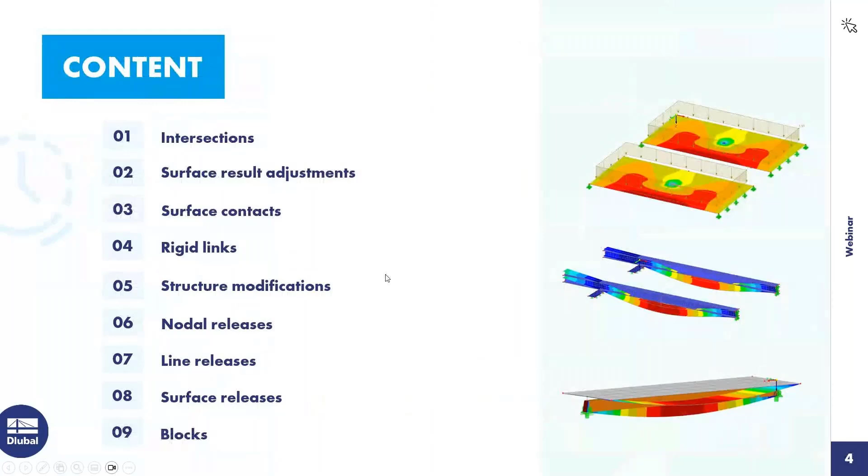To the agenda today: those are the 9 features I would like to introduce you. Very valuable features, but you will use some of them not so often, others more often. For example, you won't use the intersection so often, but the surface result adjustment is a feature you will use more often. For every feature I prepared a model, and I will explain the function of these features in the program.

Let's start in Rfem with the first model and the first feature. You can find all features under Insert, Special Objects, where there are not only 9 features, because there are 2 new ones, the design strips. That's a feature often used in the American market, and we also prepared a webinar about it. Maybe my colleague can share the link in the chat to that webinar about the design strips.

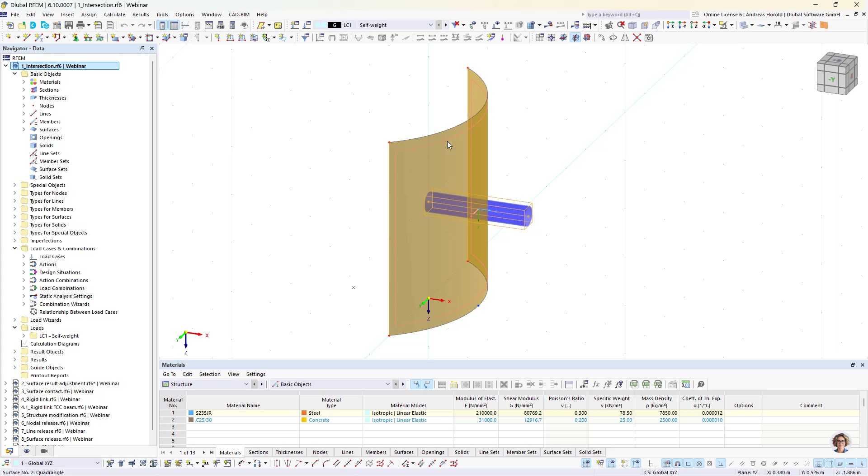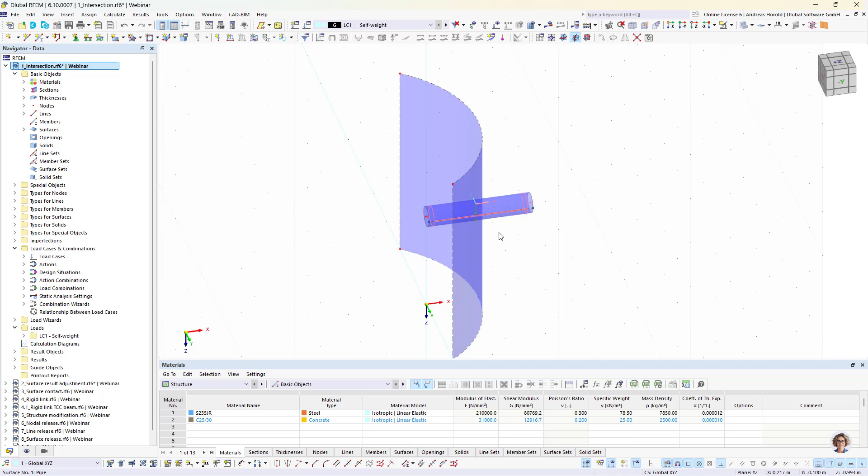Okay, let's start with the intersection. The best way is to select all the surfaces and then create the intersection. But as you can see, that's not a surface, it's a member at the moment. With a right click, I can go to member and then generate surfaces from member. Now all objects are surfaces, and we would like to create an intersection, and at the end this part of the tube should remain and not this one. We would like to have a hole in that surface.

So let's select all, then with a right click move to surfaces, and we can create the intersection. Maybe first the definition: if surfaces intersect and internal forces are transferred on the contact points, it's necessary to create an intersection. This prevents the creation of independent and unconnected subsystems. This function, create intersection, only creates the intersection line.

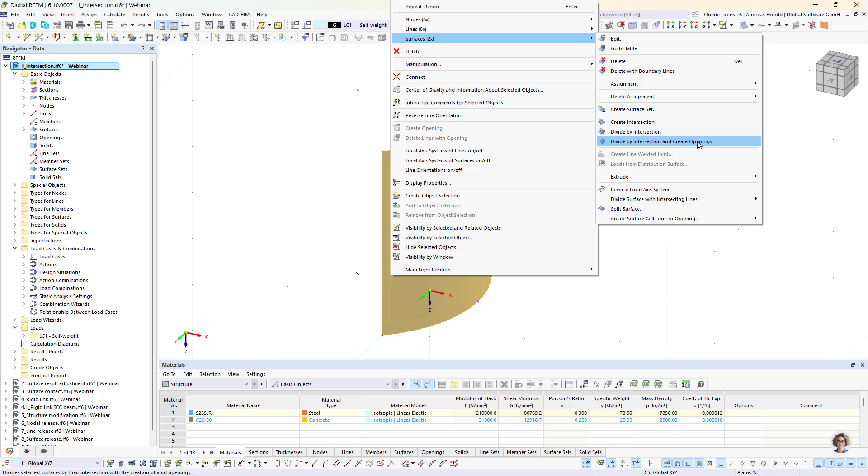I can show that you can see only this line is created. I undo all, then open the dialog again. Then divide by intersection: the intersection will be created and subsurfaces will be created, and with this function additionally the intersection surface is deleted. So we will use that function.

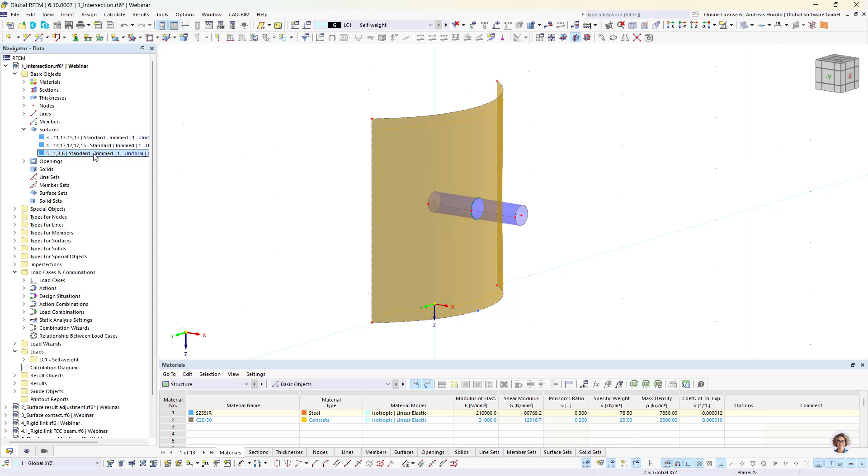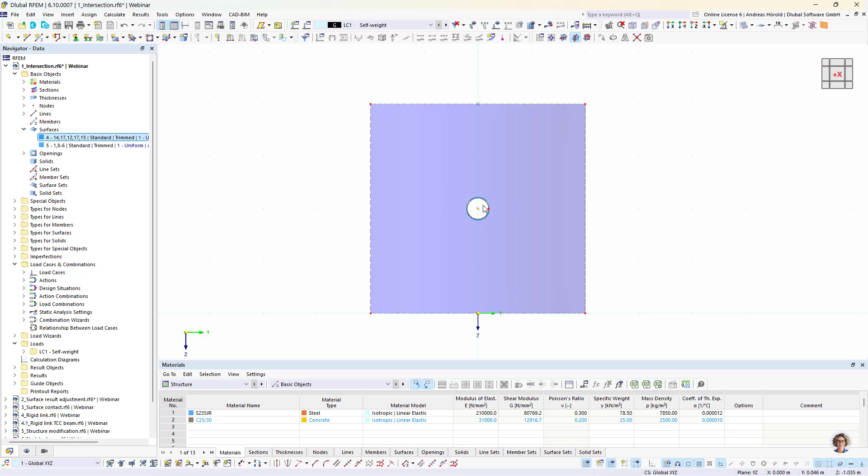You can see there's also a hole, and we can easily delete this part of the tube. But if you have more complex models, I recommend going into the Data navigator. There you see all the surfaces, and you can select the single surfaces to see what you need to delete. For example, with a right click I can delete with boundary lines. So I can also delete this line that was the middle line of the member, and now we have a correct model.

That should be all for that feature. We turn to the next model and the next feature.

So I would like to explain the surface result adjustment. You will also find it here, insert special objects.

But at first I would like to say some words about the surface results adjustment. It describes an area in the model whose graphical results are not represented by the actual diagrams, but as mean values. You can use a user-defined adjustment area to evaluate the smoothed surface internal forces. In RFEM 5, this was called average region, and now the name is surface result adjustments.

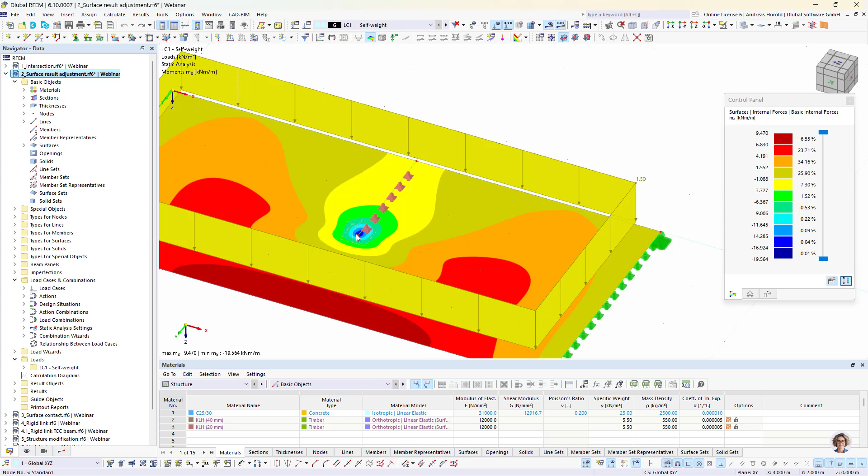We have that surface here. That's the CLT slab over a wall. And you can see there are quite high internal forces only on that point. And we would like to smooth that internal forces.

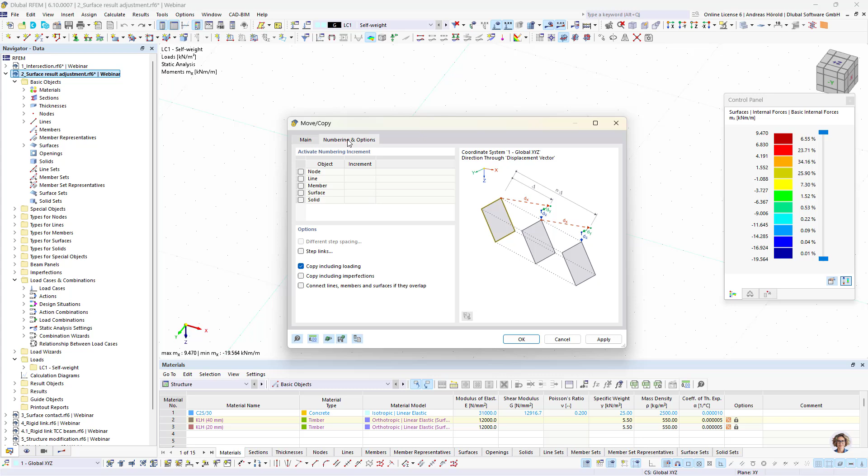To compare the results, I would like to copy that model. So create a copy, 6 meters, and copy including loading.

So I create the surface result adjustment only on that point, and we will compare it with the other point. Then in the menu, insert, special objects, surface result adjustments.

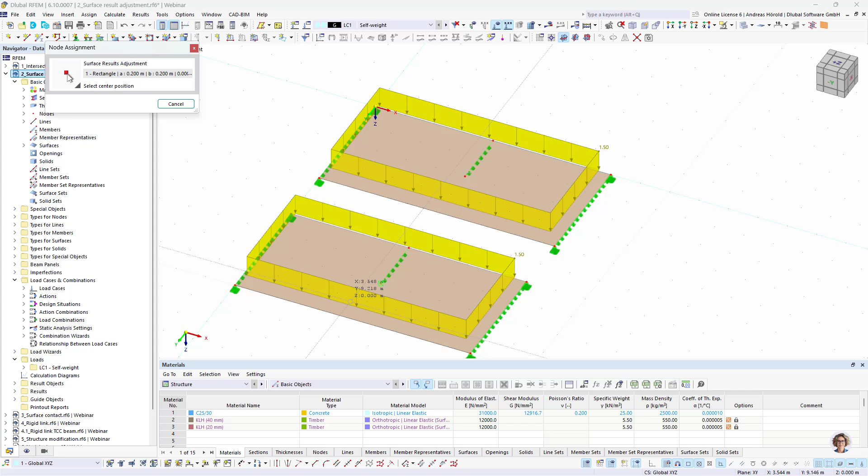Here we have different options for the shape: rectangle, circle, ellipse, and so on. The dimensions should be 20 centimeters by 20 centimeters. Then I select the endpoint of the wall and move it 10 centimeters in minus y direction.

I also have to select the surface, that surface. Then we can calculate all.

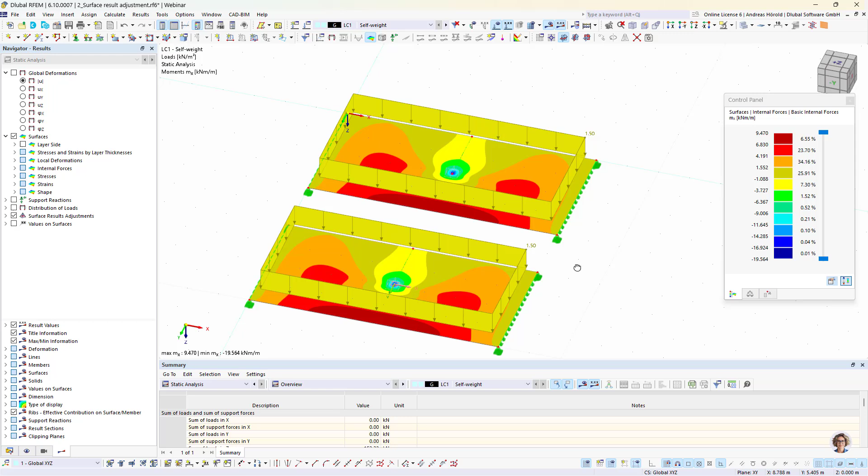You see that's the highest value, but that's the value what we have in the original model, 19.5. So let's check what the highest value is for that surface.

I deselect the original model. And you can see now the highest minus value, the lowest value, is 16.0.

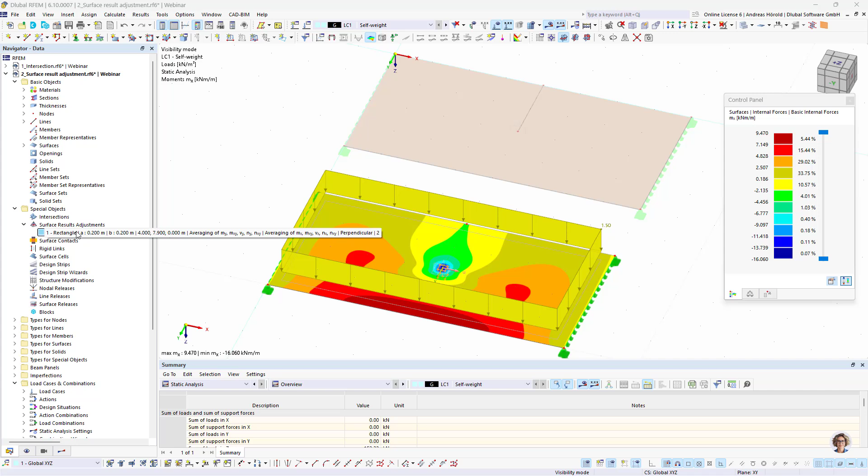Let's turn back to the surface result adjustments. I go back to special objects, you can see it here. Maybe some additional explanations of the different adjustment types.

This averaging of these values, that's the default setting for basic internal forces in surface direction u. And this is the average, the default setting for basic internal forces in surface direction v.

Contact stress area. This option is currently only relevant for the steel joints add-on.

Then user defined: the results of selected types of internal forces are averaged. In that case, mx, but you can select more if you want. That's not a problem.

As you want. Then 0: these results within the area are set to 0. You can also select the single basic internal forces.

And none: the surface internal forces are not averaged, but displayed in a regular way, when you want to average only one direction.

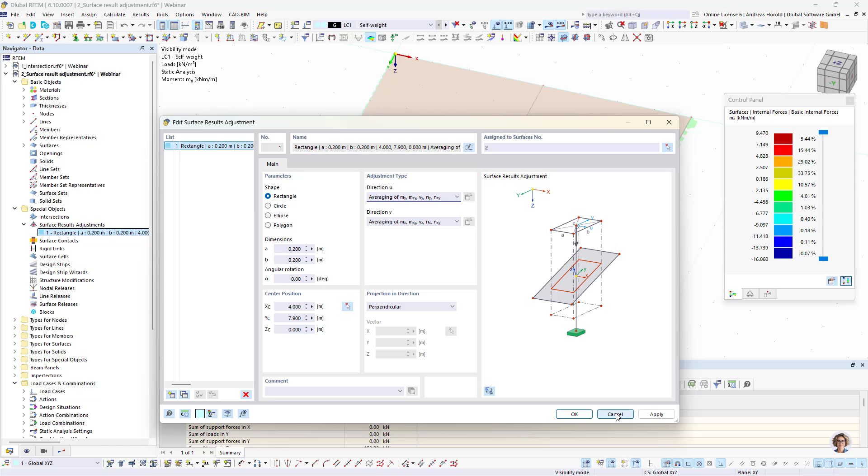So that was an additional explanation. That should be all for that model. Turn to the next model.

The next feature that I want to explain is the surface contact. A surface contact describes the connection between parallel surfaces. It is a coupling of surfaces by which you can control the transfer of forces without creating a contact solid, as was the case in RFEM 5.

This allows you to connect surfaces whose contact is, for example, only effective for compressive forces. And that's what we would like to model here. That's a member created by surfaces, and that's a concrete surface.

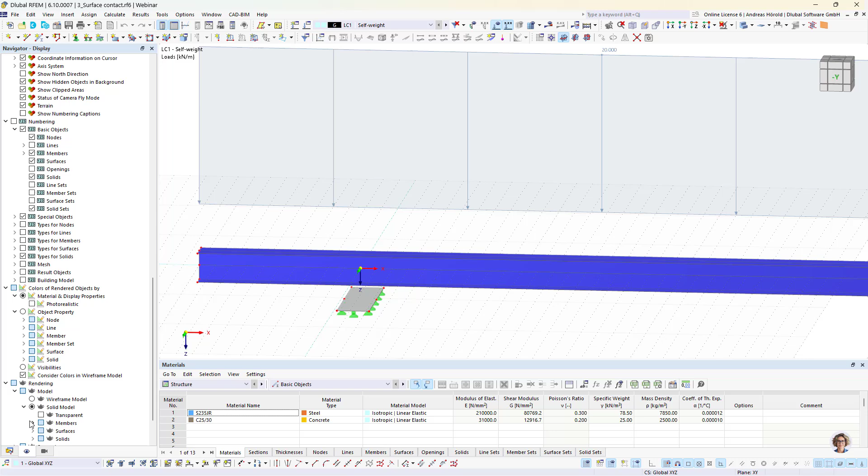Let's display it in the navigator display with the real thickness, so surface filled including thickness. That looks good. But in reality, in our model, it's not connected yet.

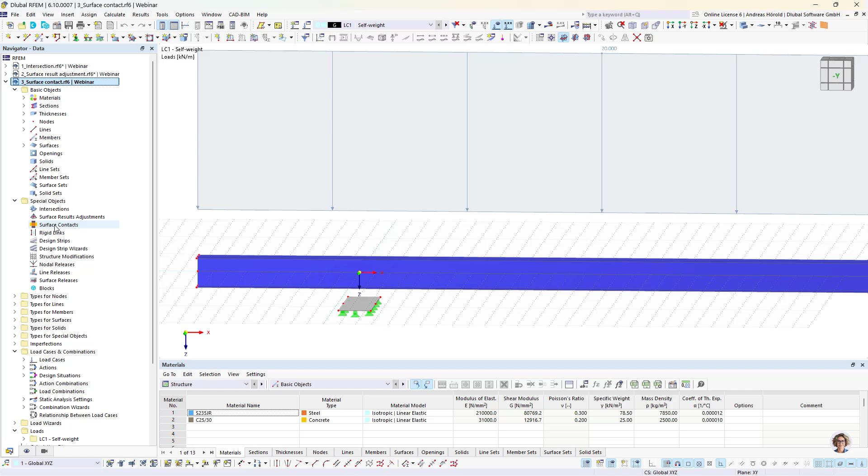So we would like to create the surface contact. This time in the navigator data, that's another option, special objects. Then right click on surface contacts, new surface contact.

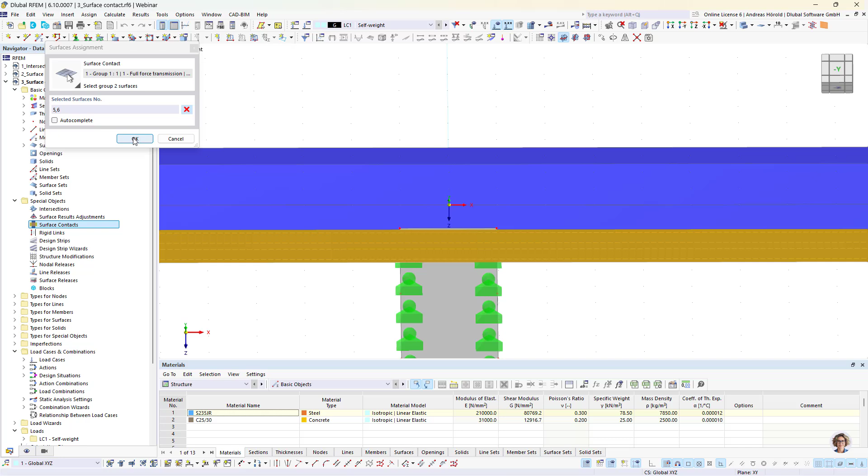At first this surface, okay. And then the flanges, the two flanges of the member here.

So let's calculate all.

The contact is there, but you can see it's rigid connected on all sides, on both sides of the concrete slab.

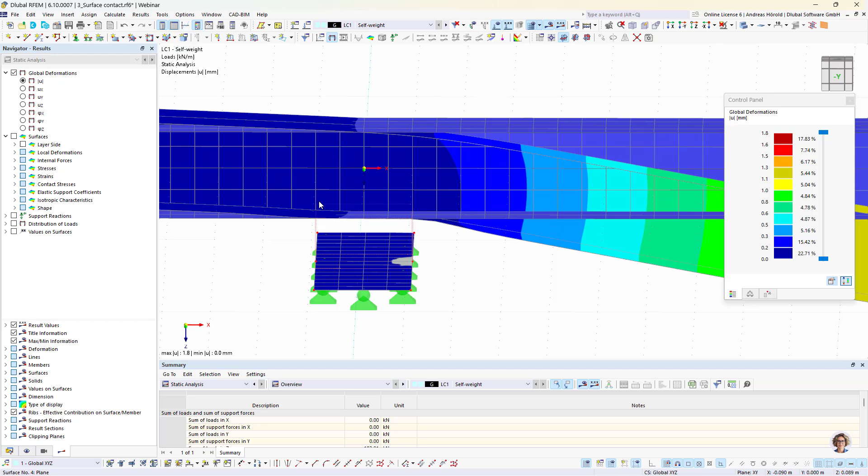But we would like to define it so that it can lift up on this side, so that the member lies loosely on the concrete block. To compare it better, I copy all in y direction, 2 meters.

2 meters. Create a copy and including loading, okay.

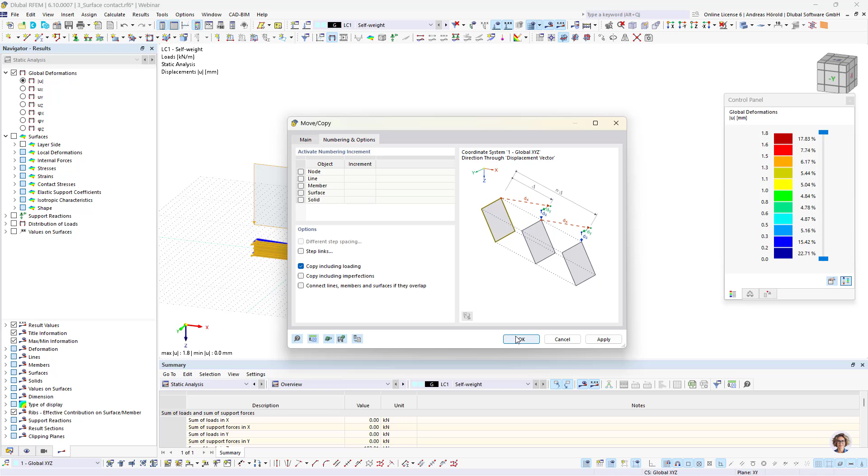So I modify this surface contact. Not a full force transmission, but a new surface contact type: failure under tension, so it can be lifted up. And in that case, rigid friction, I define only a very small friction coefficient.

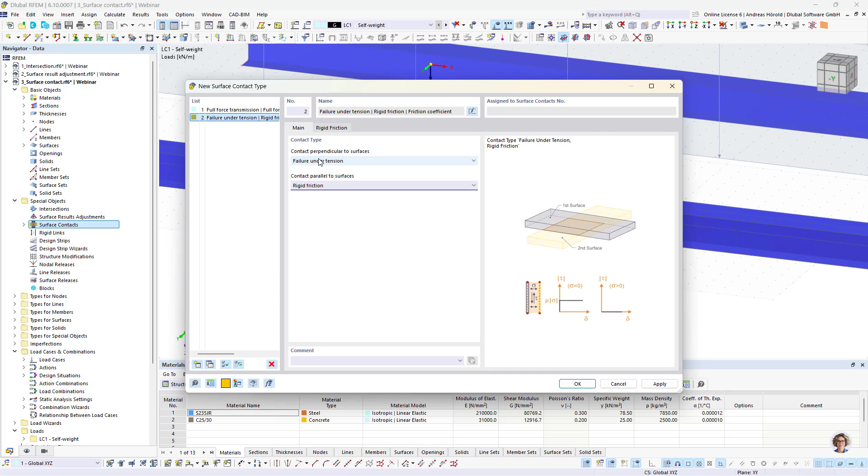But that's very important here. Okay, then we calculate all.

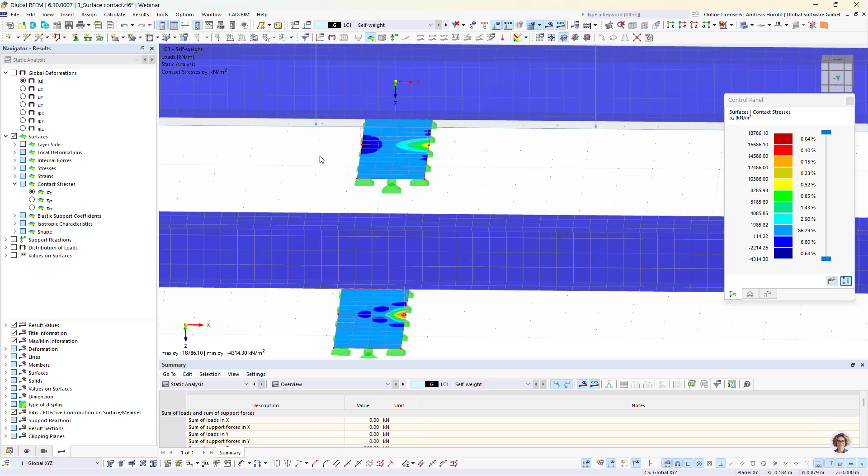And now you can see the difference. It can lift up here on this side. I can also show that on the contact stresses. Now you can see in the original model there is compression here and tension on this side, and on this model there's only compression on the right side and no tension on this side.

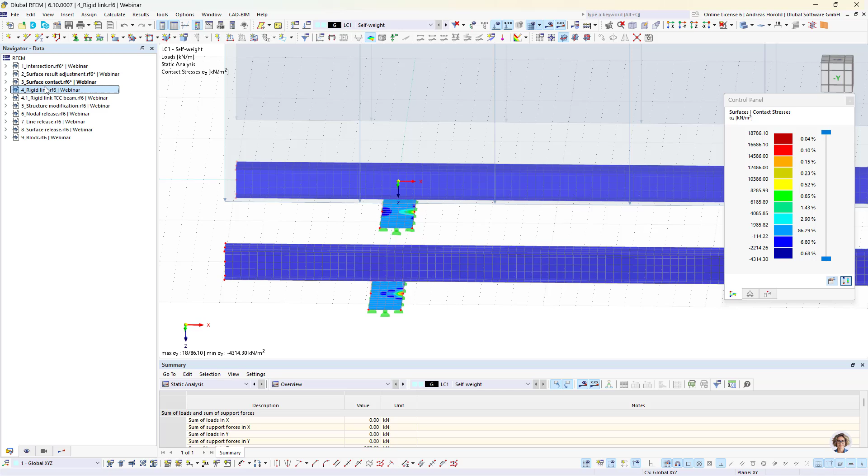Okay, that's all to that feature. We turn to the next model and the next feature. Rigid links is the next feature. By using rigid links, you can model connections between lines, members, and surfaces without defining coupling members or rigid surfaces between the objects. Deformations of coupled nodes, lines, and members are identical for a rigid link.

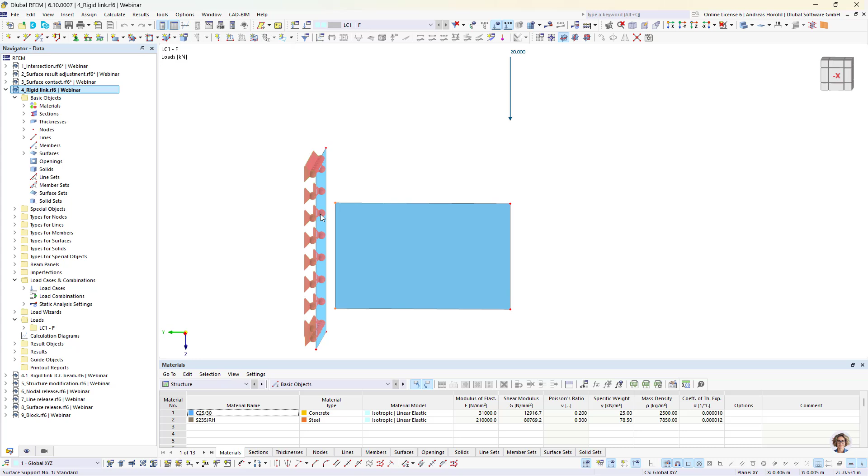In that model, I could also define a surface here, a rigid surface. But with that feature, it's quite easier. The real advantage of this feature is the objects can be placed on their actual location. When I turn to the navigator display and select filled including thickness, you can see all is in the place where it really is. So, and now I create the rigid links.

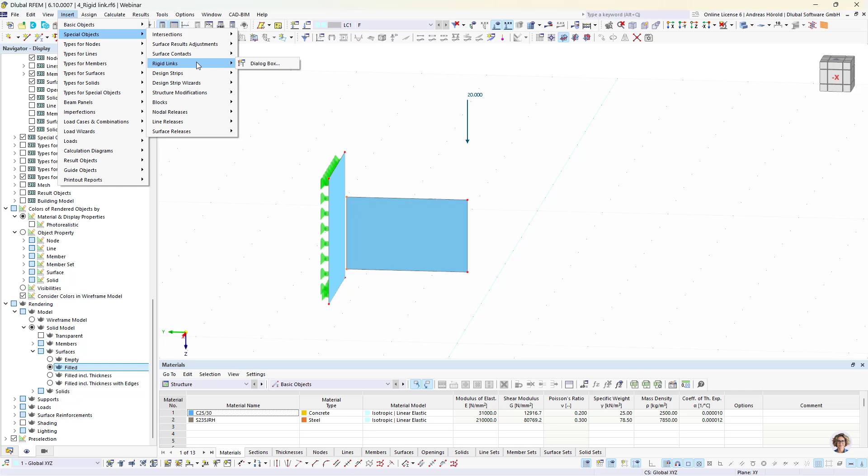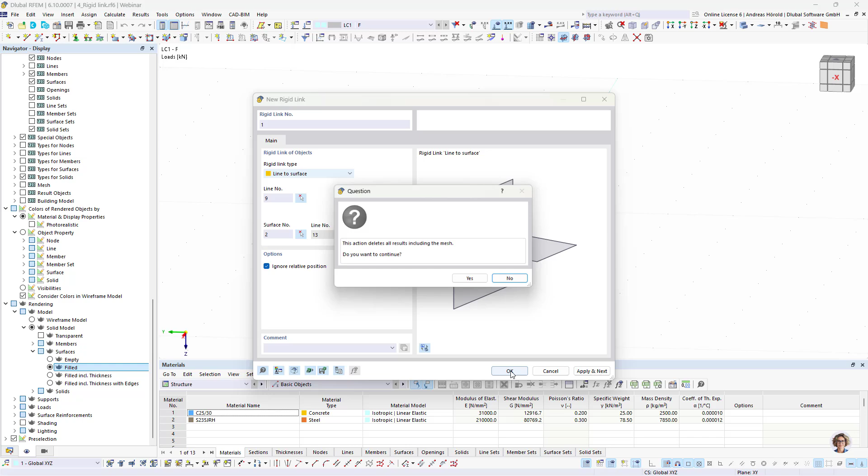So insert, special objects, rigid links. In our case, line to surface. That's the line and that's the surface. And you can see the line and the surface is automatically created. Okay. So now we can calculate all. Okay, that looks quite good.

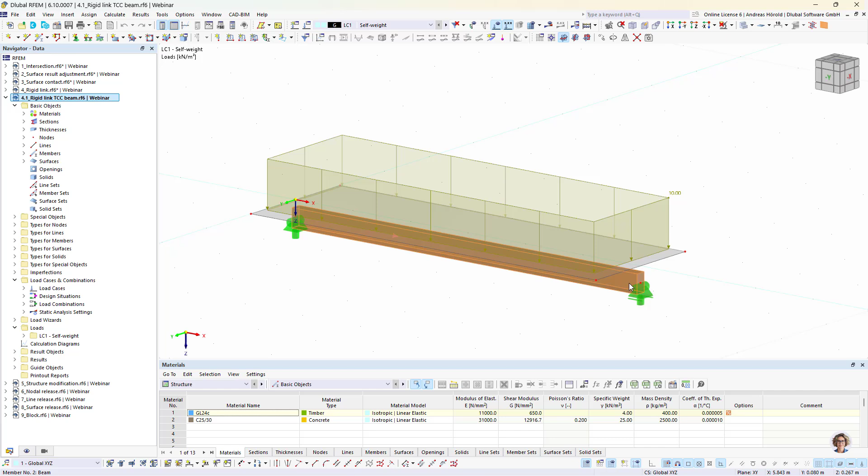I would like to show that on a more practical example, I think. That's a timber concrete composite beam. You can see that's a concrete surface in its actual position, and that's the timber member. And we can also go to the navigator display and select filled including thickness. But we need to create the connection.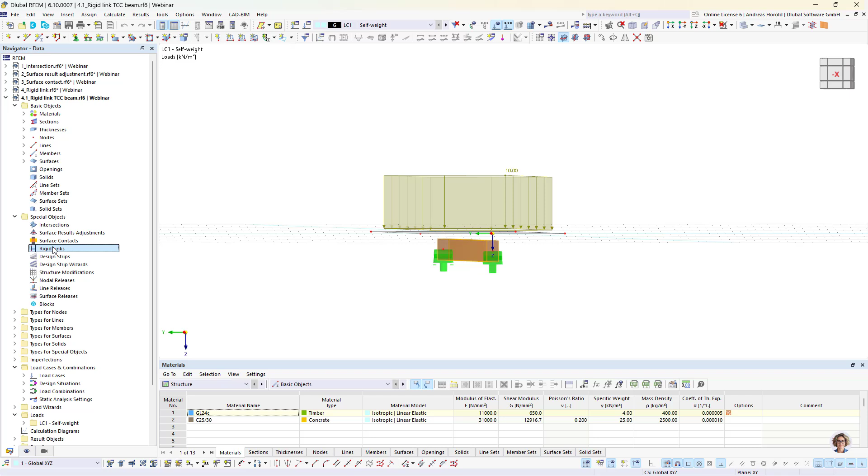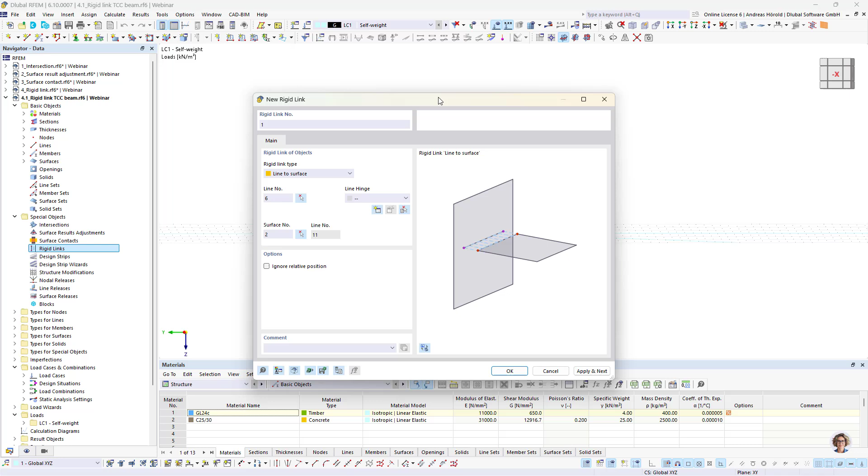So special objects, rigid links, right-click, new rigid link, line to surface again, the middle line of the timber member and the surface. Okay, and this line is created automatically. And we have to deselect that option, ignore relative position, because we would like to consider that the member is below the surface. Okay, so let's calculate all.

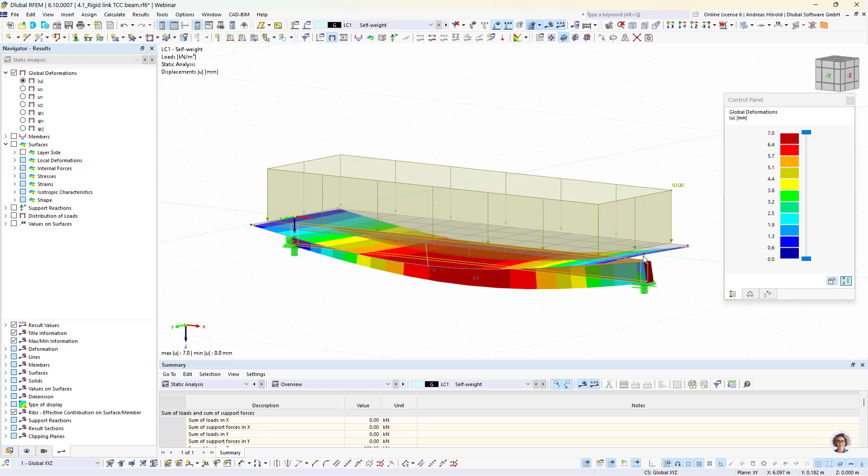At the moment, we have a rigid connection between the surface and the member. And that's not really correct, because there are joints for this connection, and they are not rigid. And that's why we need to select a line hinge. So how to do that? We take a look at the result. I think you can't really see it. Okay. 6.8 is the deformation in that point.

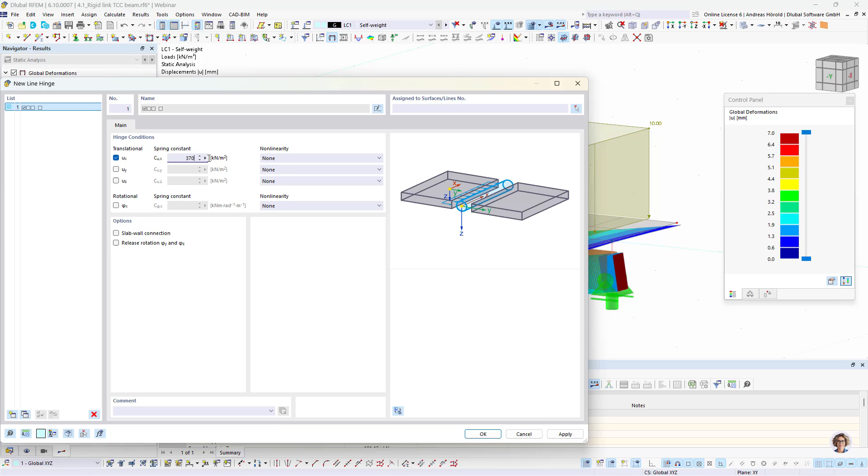Then we do a double click on the rigid link, and we create a line hinge now for the connection of the two parts, the member and the surface. And we define a spring constant for the longitudinal direction of the member. So 370,000. Okay, it can be nails or something like that.

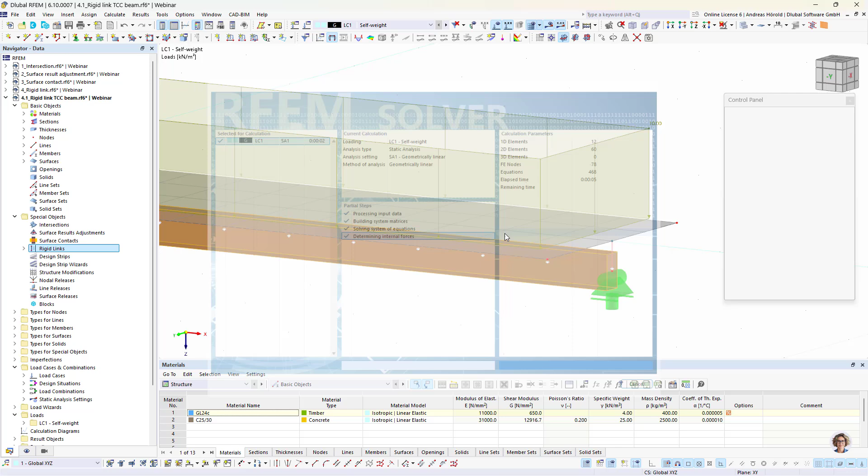Okay, we had 6.8 for the deformation, and now it should increase. Now where are we? 7.6. It was increased. Okay, then we turn to the next model and the next feature.

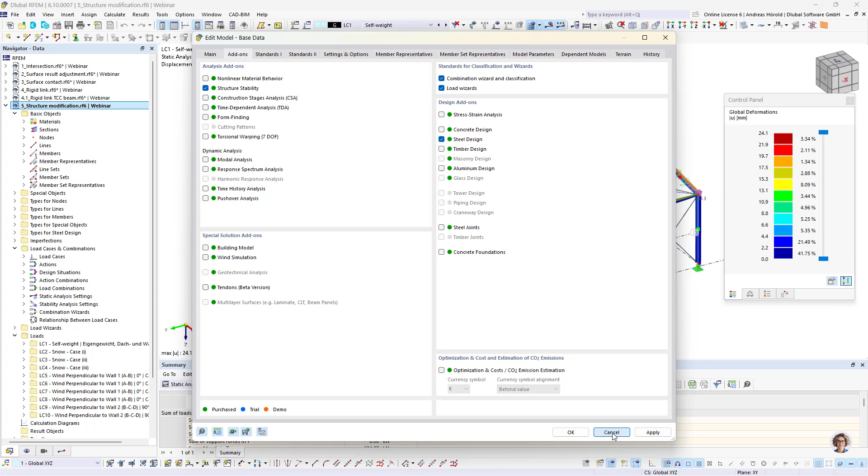The next feature is the structure modification. I would like to display it on that model. I use the model that you can find in the Dlubal Center. Just a moment, I have to move it to the right screen. You can find it under examples, projects, examples, and that's the model. Okay, and I turn to the base data. I selected the add-on structure stability, and I did a stability analysis.

But at first, some words to the definition of the structure modification. It allows you to individually adjust stiffness of materials, objects, and object types. Furthermore, selected objects or nonlinear object properties can be deactivated for the calculation. Structure modification must be assigned to load cases or load combinations. We will do that later. I show you the design situation where I selected the structure stability.

So I turn to the combination wizard, and I selected the stability analysis. Under static analysis and design situation number 1, I can find the minimum critical load factor. That's 3.6 and the combination number 13. So let's turn to the stability analysis and the combination number 13.

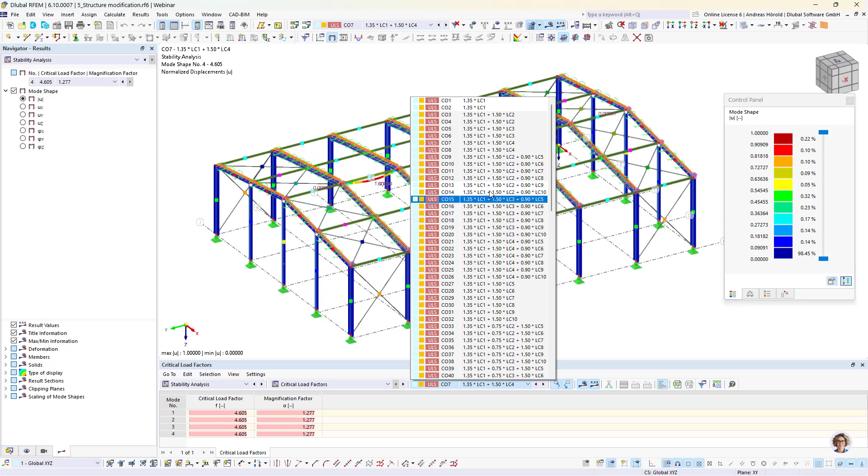And you can see the mode shapes are not global mode shapes, but local. For this member and this member and so on. And I would like to see a global mode shape. I could calculate more critical load factors, maybe 40, and search for the first global mode shape, or I use that trick.

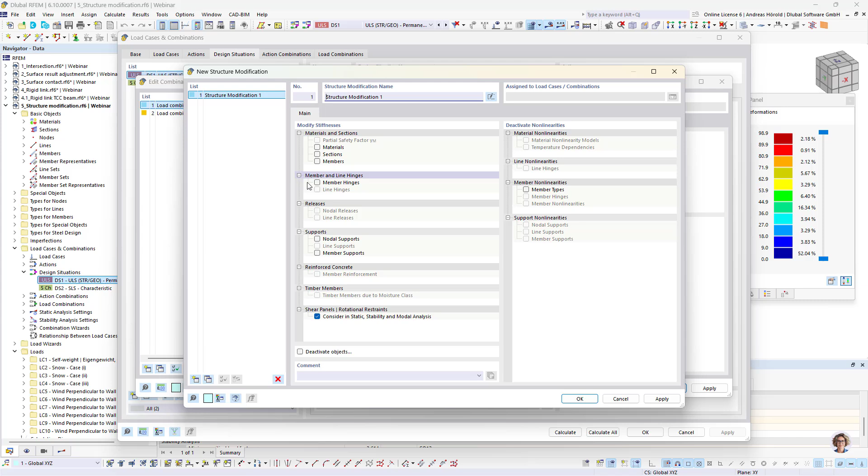So I turn back to the design situation number 1, then to the combination wizard. And I consider structure modification, and I create a new structure modification. That's what I said at the beginning. You can modify the stiffness of material, section, members, member hinges, and so on. Let's do that as an example for the sections.

So I increase the moment of inertia factor of the coupling members and these members in the first row. So a factor of 10 here, for IY and IZ. Okay. Yes.

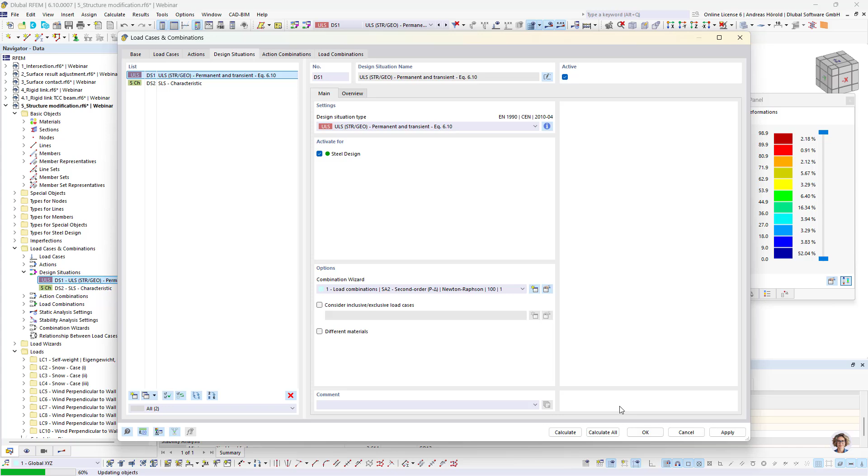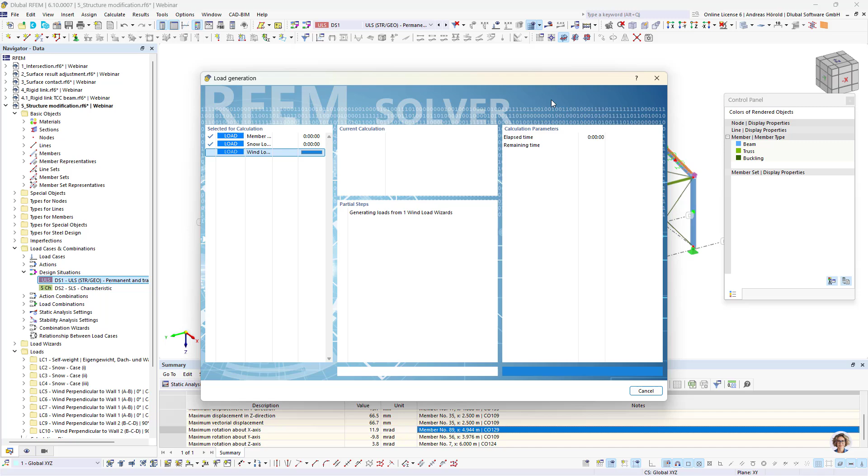Okay, those are the members. This member and these coupling members. So then let's calculate that, or we can do the static analysis. That's okay. That should take some time. We have 100 combinations. At first the static analysis will be done, and then the stability analysis. But you can see I have more than one core, and it's a parallel calculation. But we need to wait some seconds.

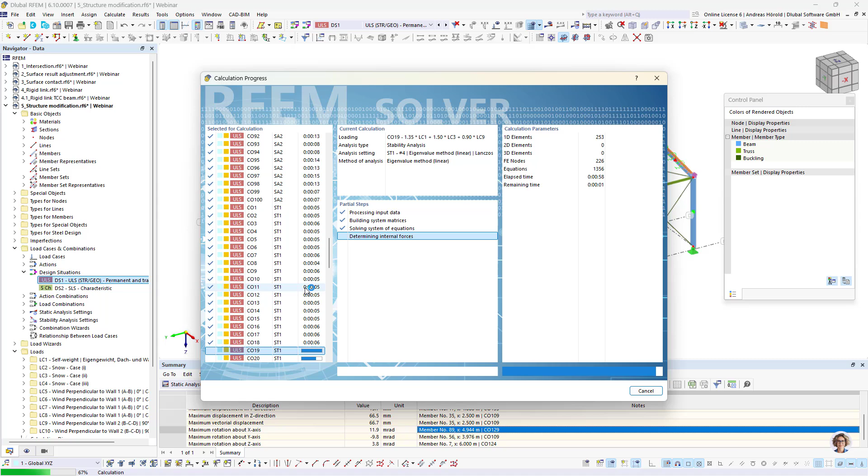And the result will be, because we increased the stiffness of the coupling members and so on, that we will get a global mode shape for the first mode shapes. So let's take a look at the stability analysis. Combination number 13. Okay, and you can see the first mode shape is a global mode shape. Also the second and the third and so on. Okay.

Just use that function only for such things; you must not increase the stiffness of single members except for such calculations here. It's a trick. Okay, then we turn to the next model.

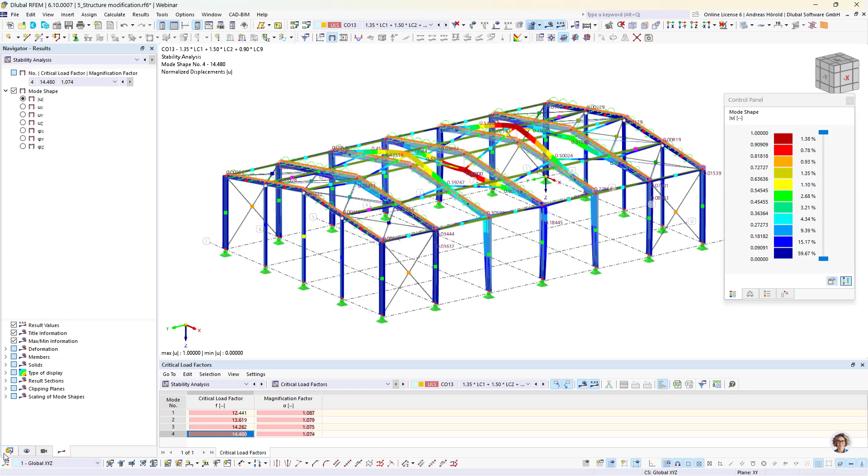And I would like to explain the nodal release. With a nodal release, the model can be decoupled at a specific location. You can use it to model, for example, a beam lying loosely on top of another. I created this simple model, and I would like to model that this member lies loosely on top of this one. So insert, special objects, nodal releases. Then node number 5. Okay. Then I would like to release these two members. Okay.

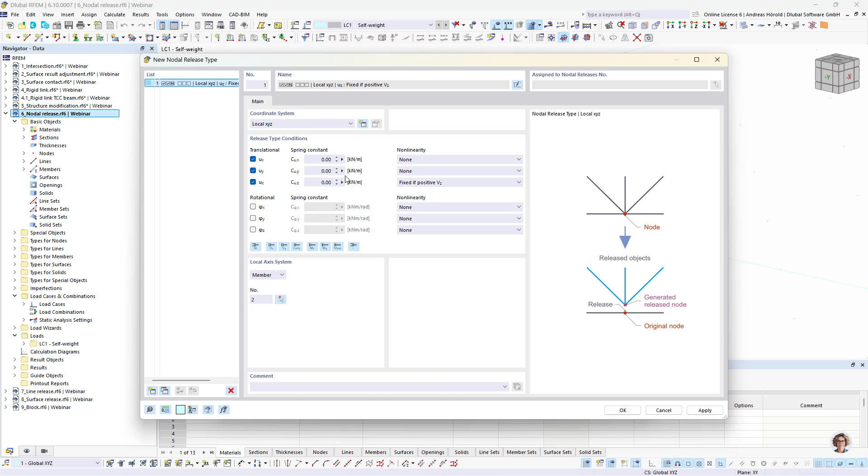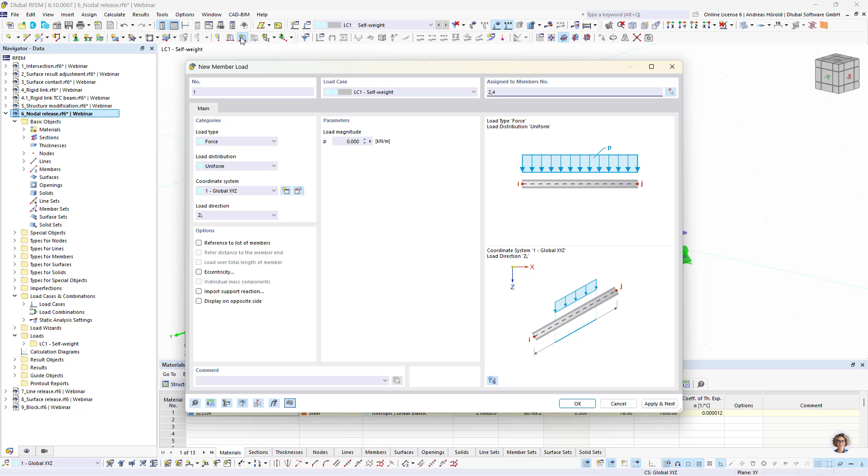So then nodal release type. I create a new one. And for the z direction, nonlinearity fixed if positive. Reset. Okay. Then I have to define a local axis system of this member. Okay, that should be all. Okay. So then I create a load in -z direction, -30. Okay.

And now it should lift it up. Okay, that works. We can change the direction. Okay, and now the deformation in the middle point should be the same. Okay, good. That was all for that feature. We turn to the next feature and the next model.

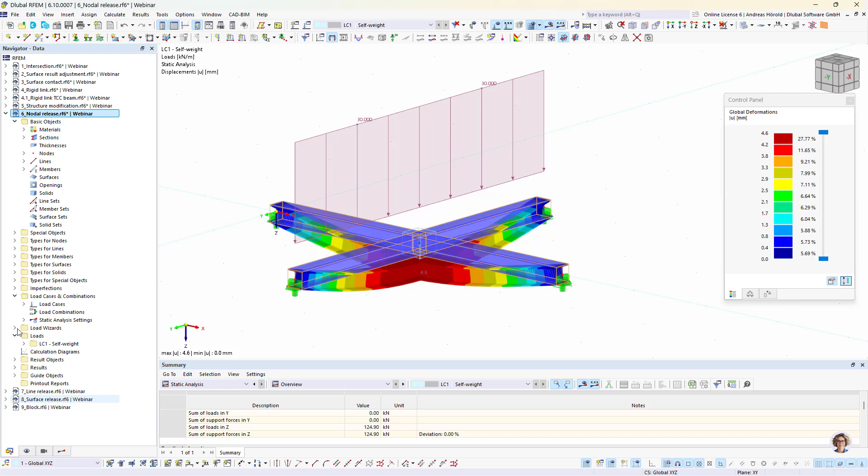Line release. I prepared that model, but what is a line release for? A line release allows the model to be decoupled along a line. You can use it to model, for example, two surfaces being loosely connected or transferring only compressive forces at the common boundary line. For this model, you can see there is a moment over the support. But we would like to connect this surface with this surface hinged.

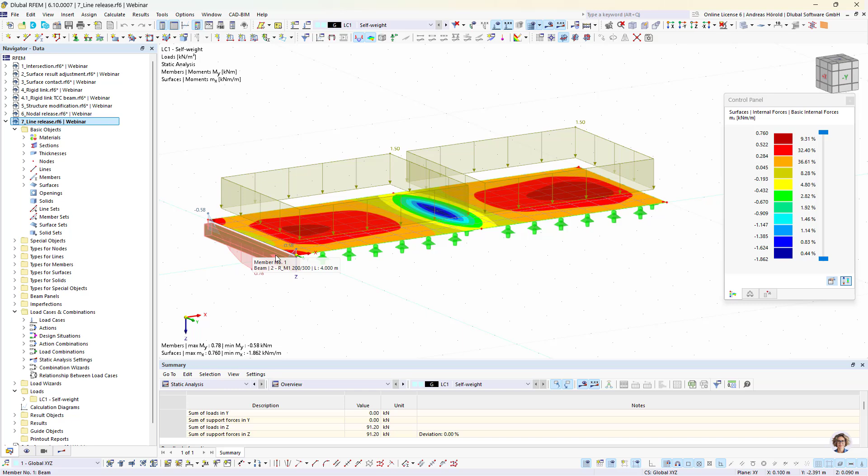And at the moment it is a composite beam; the surface and the member are rigidly connected. You can see that in the moment at the end, and that's why we would like to define that the member is longitudinally movable. Okay. So we start: insert, special objects, line releases. Okay. The line is this one.

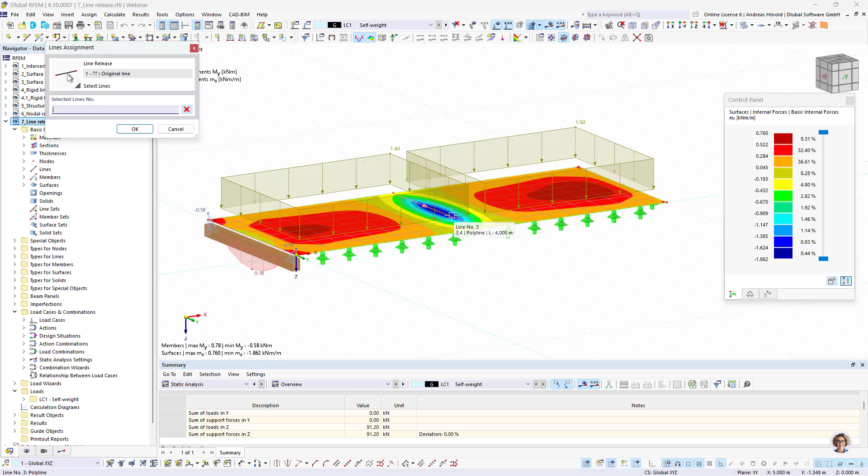Or just a moment, to compare the results better, I would like to copy the surface again. Or all components. Copy 6 meters or 7 meters. Create a copy with loading. Okay. And we will define the line releases only for this model. So again, insert special objects, line releases. So line number 11. Okay. Then the surface number, this one. Okay.

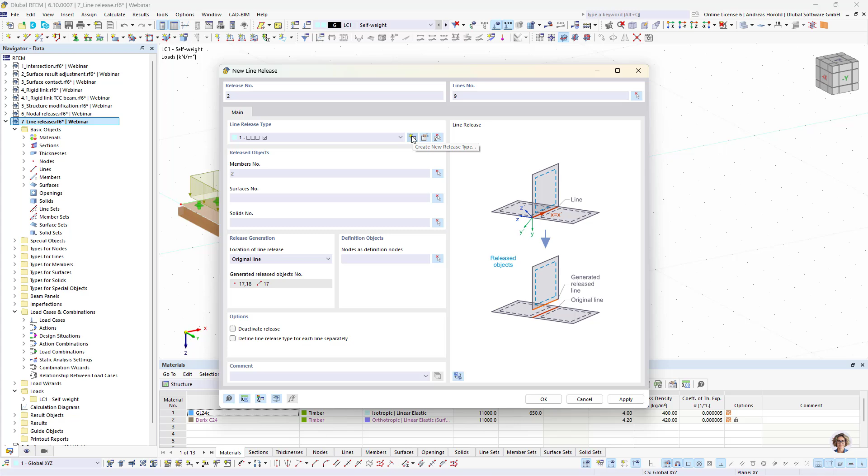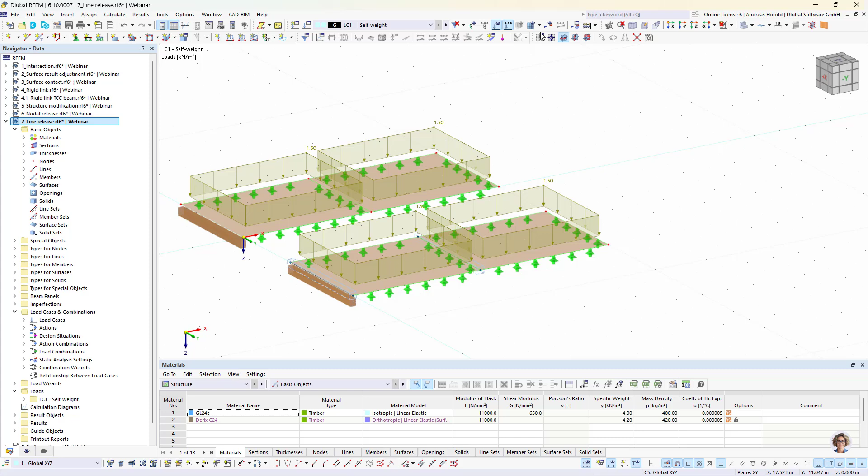Then I have to define a line release type. And I would like to create a hinged connection. Okay. So, and another line release on that line. Insert special objects, line releases. So line number 9. Okay. Member number 2. And I create a new line release type. And I create a very small spring so that it can also calculate the model. It's not completely movable, a very small spring constant. So let's calculate all.

Okay, now you can see the connection is hinged between the two surfaces, and there are also no moments at the ends of the member because it's longitudinally movable at that connection. Okay, that was all for that feature.

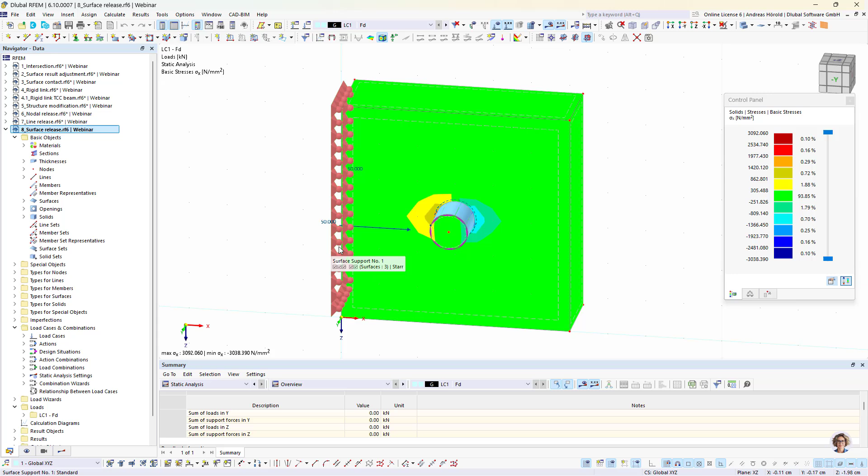Then I would like to explain the feature surface release with this model. Maybe a definition of the surface release: with a surface release, the model can be decoupled on the surface. You can use it to model, for example, solids being connected in an unbraced manner or transferring only compressive forces on the contact surface. I would like to explain that on that model.

That's a bolt, and you can see in that plate here there are tension basic stresses also on this side, and that's not correct. The bolt is at the moment glued on all sides of the hole here, and the real behavior should be that it's compression on that side and no tension on this side.

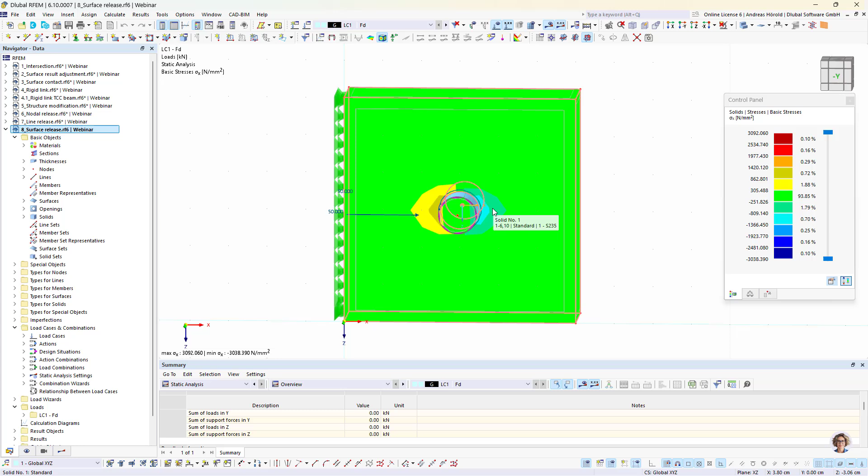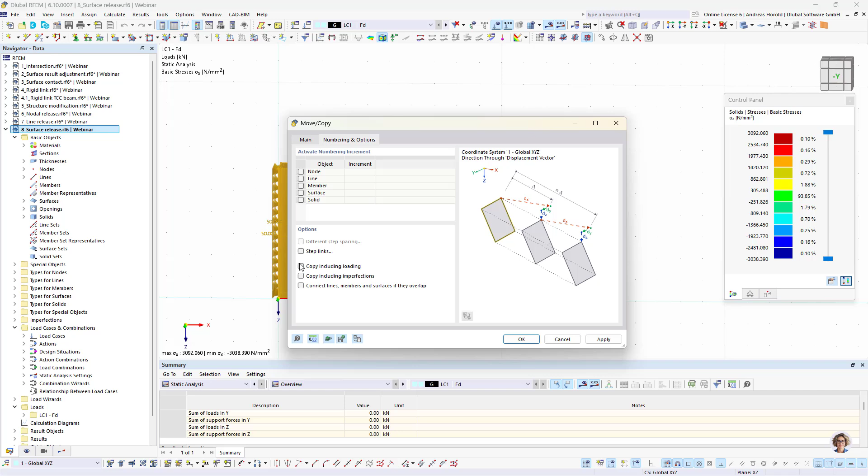Okay, and with this surface release, it's not necessary to create contact solids between the two surfaces. So to see the difference better, I create a copy 10 centimeters in X direction, including loading. And we will compare the results better when we see the two models.

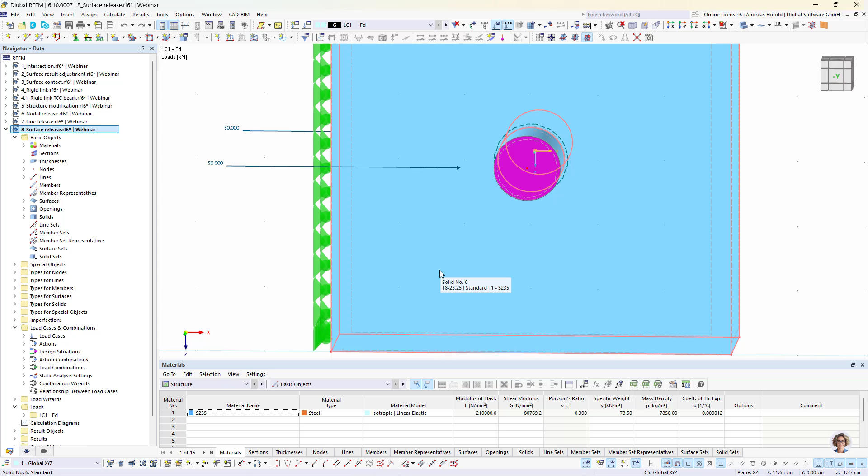So then I select only the bolt. I can do that with this function, but when you have got a larger model and you would like to select only the bolt, when I press nothing, I can't select it. And the trick is to press the Alt key. And then you can select only that bolt. So then only this should be displayed.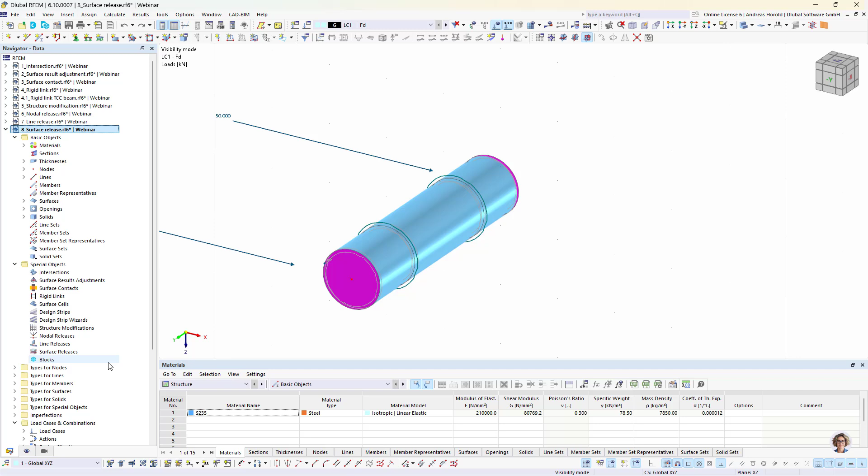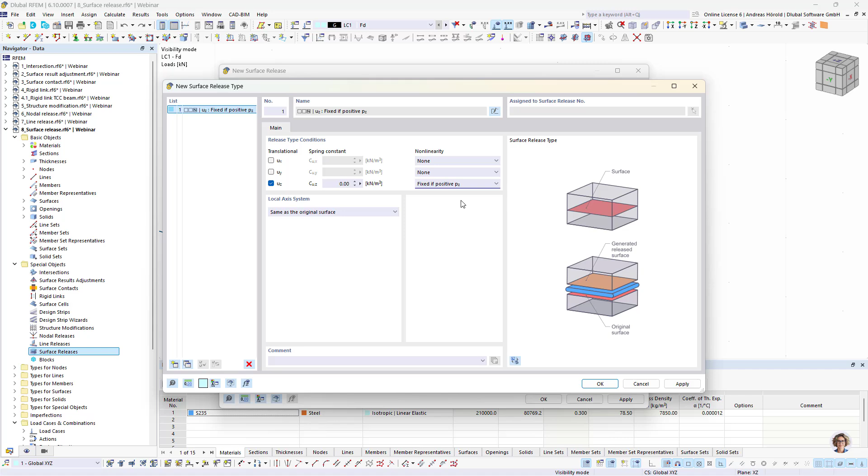And now I create the surface release. So this time with the navigator data, special objects, surface releases, right click, new surface release. So surface number, this one. Okay. So then surface release type. I select a nonlinearity here, fixed if positive pz, so that only compression is transferred and no tension. Okay.

And we would like to release the solid number. We have to display all now. Number 6. Okay. That's all. So let's calculate all.

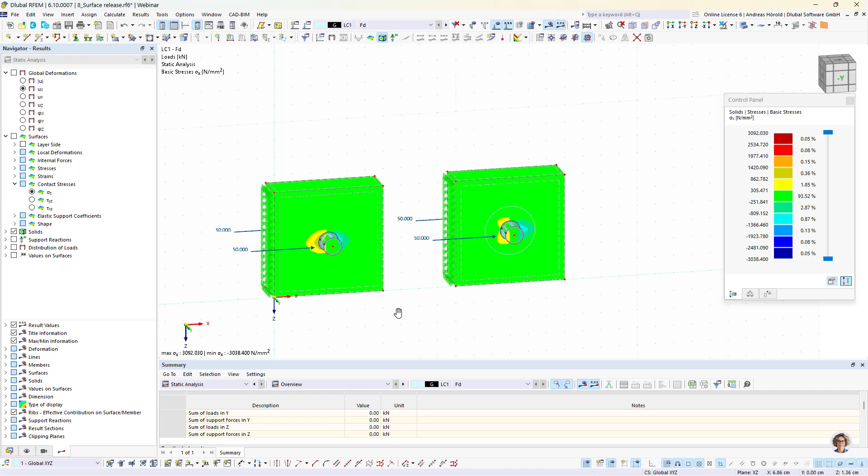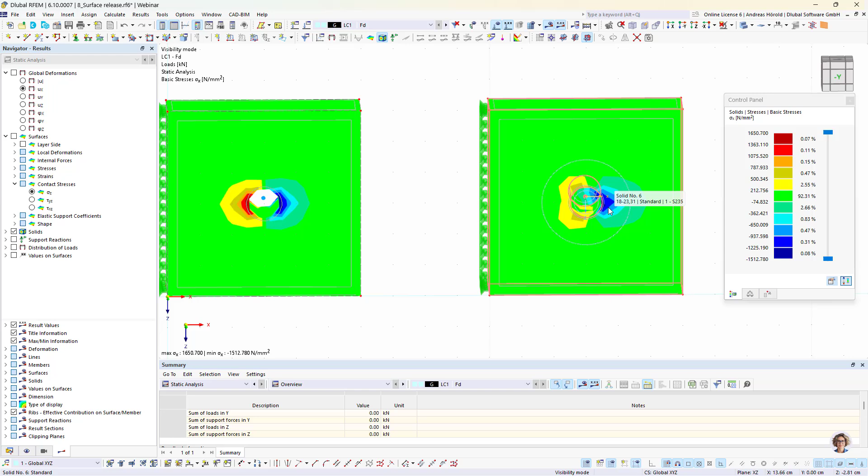So now you can see the difference better. Let's deselect the bolts, then we will see it better. Hide selected objects. Okay. Now you can see the tension here on that side, and the tension is near to 0 on that side, and we have only compression on the right side. Okay, I hope it's clear now. I didn't deselect this side of the bolt, but it's the same result.

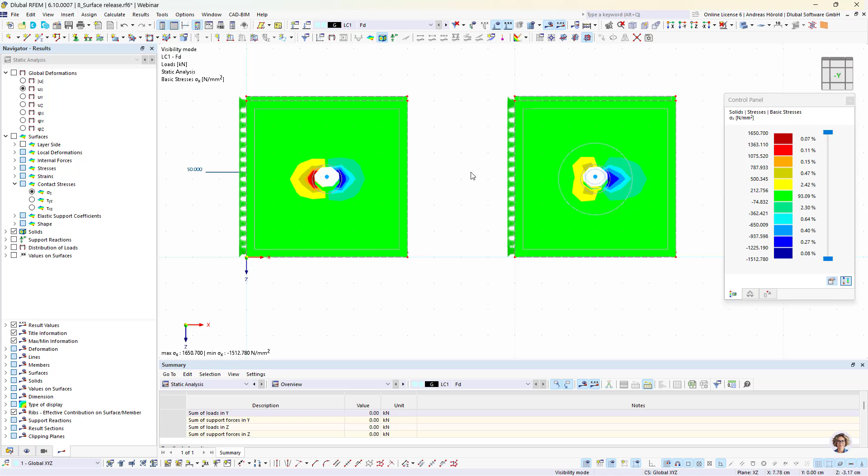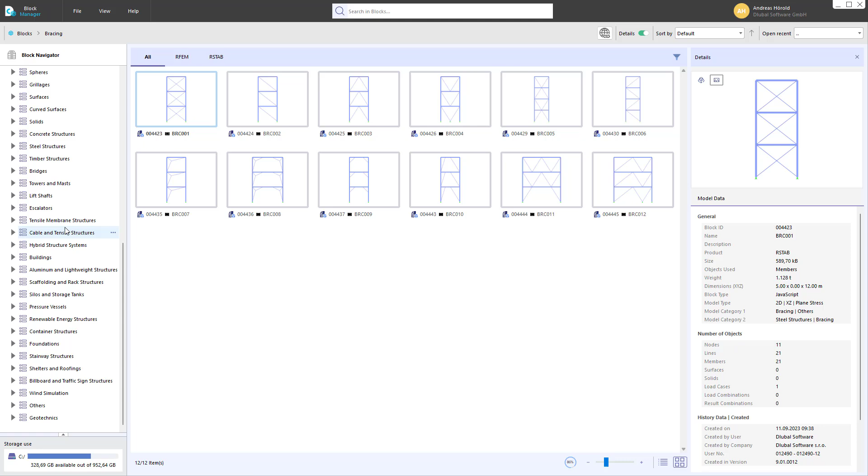Okay, that's all for that model, and we turn to the last feature for today, the blocks. You can reach the blocks with the block manager, and that's a huge database of beams, trusses, frames, bracings, and so on. And as an example, I would like to show it on a storage, on a silo. Okay, I select this one.

And you can define the parameters for the blocks. I will show that as an example here. For example, in that case, the shell height, shell radius, and so on. Let's change some parameters. The shell height, then maybe the thickness should be a little bit higher. Maybe 8 millimeters. Okay.

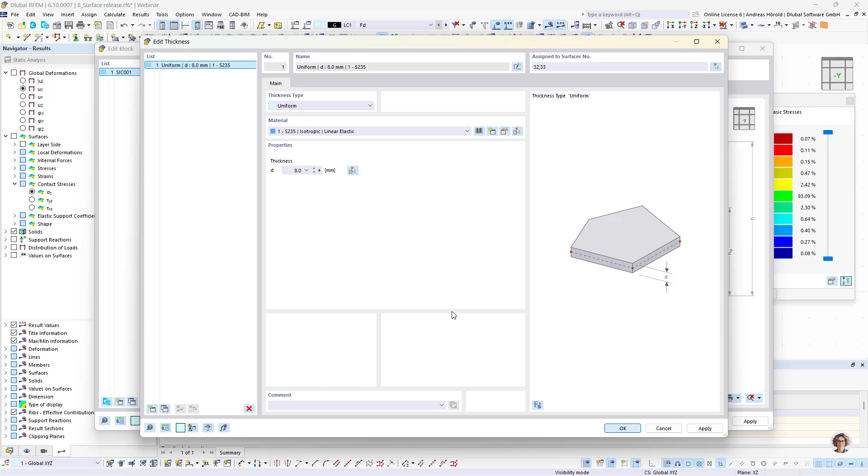Then you can also create hydrostatic pressure for that model. Let's change some parameters, 500. That's okay. I have to modify or create a new load case. Filling, and action category imposed load. Okay. And now let's create the model.

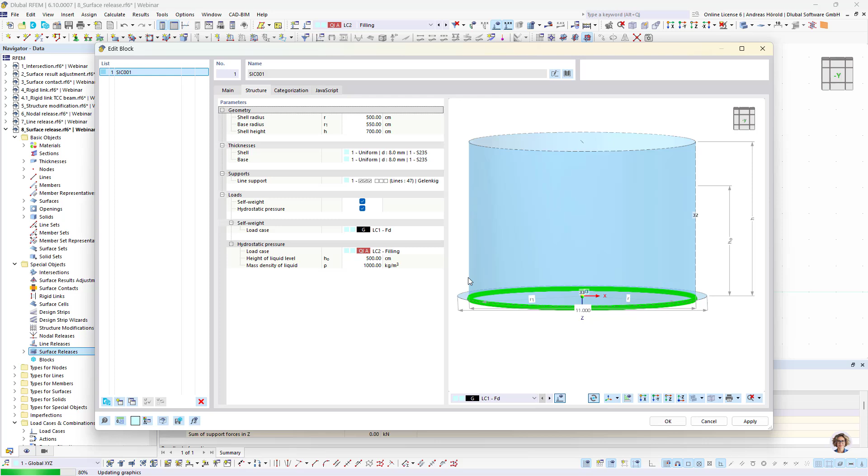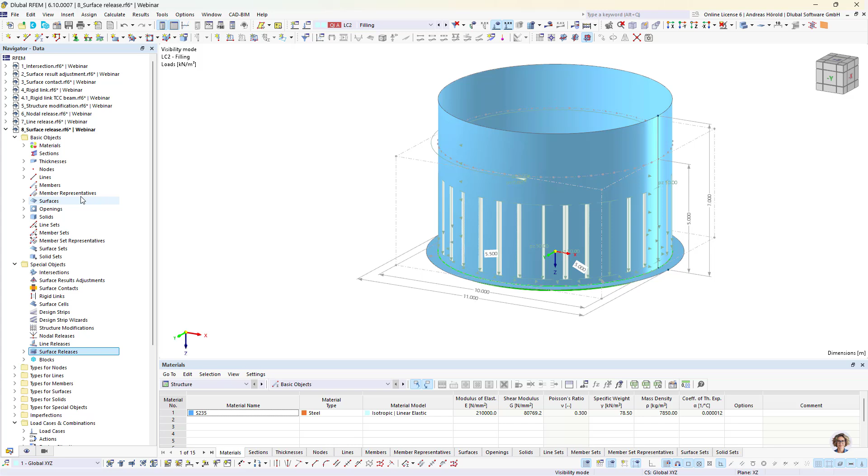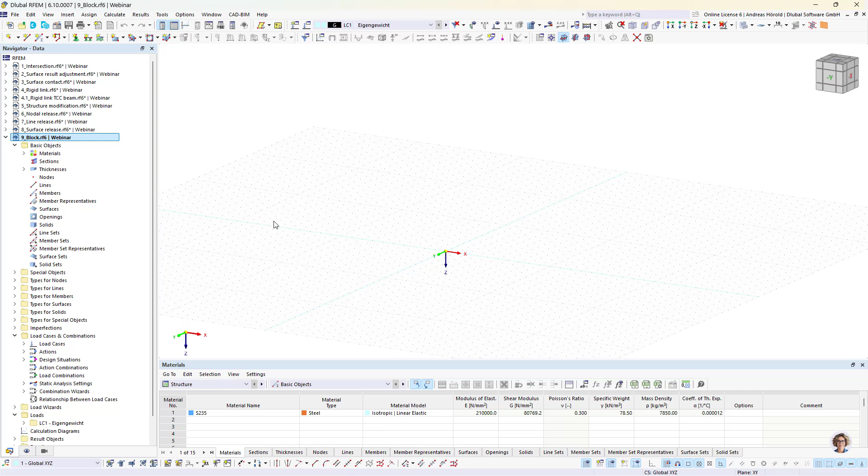I created it in the same model here. That was a mistake. Let me turn to the prepared empty model. I do it again, just a moment. So the silo, change the parameters again. Eight millimeters. Filling. Okay, and I changed the German spelling to English. Self-weight. Okay.

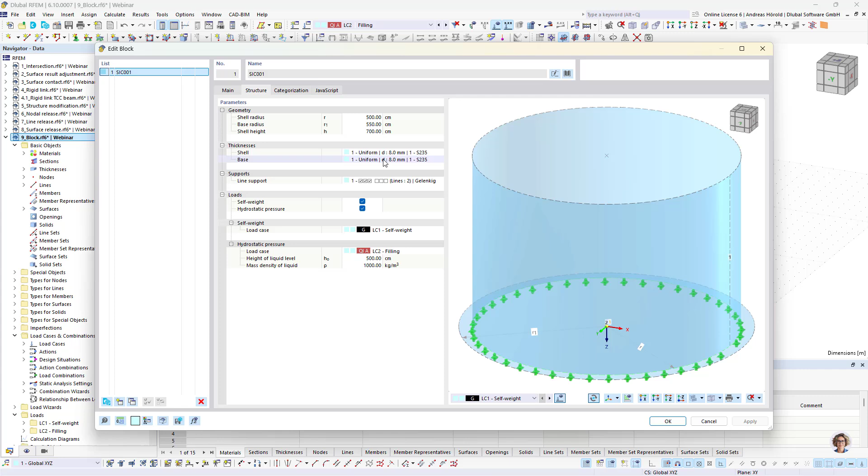So you can see also that the load case is created and the model, and you can change the parameters of the block anytime. Sorry, that line I have to click. I can edit the block also later. Okay. So that should be all for this feature.

That's also the end of the webinar. I hope I could explain features that are valuable for you. You can decide it by yourself.